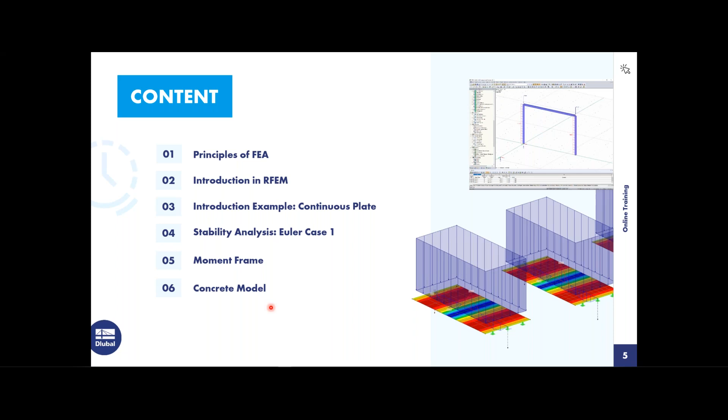So to start off, we are going to go through the basics of finite element analysis. Basically, computer software is based on the displacement method. Another method you may be aware of is the force method, where the unknown is the force, and then you can calculate the internal forces based on this. With the displacement method, the unknown is the displacement of the structure or element that you are modeling. First, you calculate the displacement vectors, then the internal forces, and after that, the support reactions.

Next, an analytical solution can prove to be difficult with large complicated structures. Doing hand calculations for a large complicated structure can almost seem impossible, and the limits are basically being reached. So it is hard to yield accurate results, and this is where FEA is then required.

So with FEA, the structure model is taken into the program and converted into a finite interconnected element mesh. Then the material and the cross-section properties are given at each of these FE nodes, and the mechanical behavior is transferred between each of these elements within the structure. A good word to know is discretization. This is basically when the structure is being submeshed into finite elements. So I'd like you to walk away with this word.

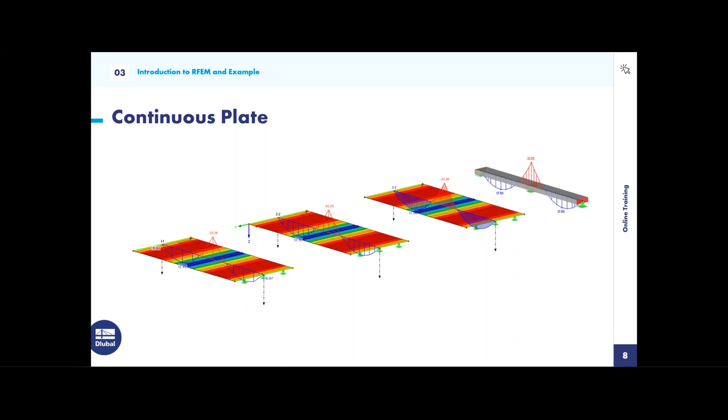So now I think is a good time to start the continuous plate example. You can see a continuous plate is modeled here. We have 3 of them. We're going to compare the results of the bending moment with this continuous beam at the end here, and I think this should be pretty interesting. So now we can jump into RFEM. I'm just going to pull up RFEM.

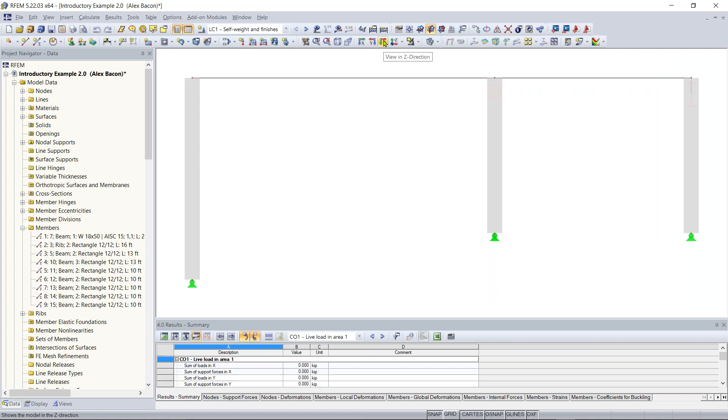Now, if we want to change our view within this work window, we can do that up here in the view section of the toolbar. If I want to maybe get a side view of either the XZ plane or the YZ plane, we can do that. We can also look at the Z direction to get a top-down view.

There are also more options within this drop-down menu, and we can view maybe the reverse Z direction to get a bottom view of our structure. We can also set our structure to an isometric view to get a nice clean view, which is also helpful if you need to reset the view of your model.

On the left-hand side here, back in our project navigator, at the bottom under our add-on modules, we have the list of add-on modules within RFEM. With the student license, you do have access to all of these add-on modules, which is very nice.

These add-on modules are used for design. RFEM is great for getting the analysis of internal forces and deformations on your structure, but if you want to design something, such as a concrete member or a concrete surface, you need these add-on modules.

And you don't have to have all of these add-on modules. Let's say you only want to design concrete members and surfaces, you can just simply purchase those add-on modules. But for you guys, they come with the student license.

So now we can move on to the tabs down here at the bottom of our project navigator. We have our Display tab -- this one we were in is the Data tab. Under the Display tab, you have lots of customization abilities where you can turn off or turn on anything within the model. You can see that all these options are organized within trees, and we can click the plus to expand these trees.

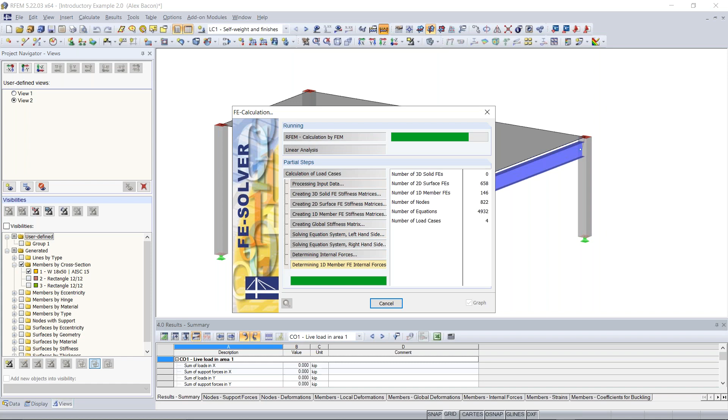Next, we can view results. I can go up here to my Calculate All button, and this will run a calculation on our structure. Right now I'm only viewing one load case, and that is the self-weight of the structure. So you can see all my global deformations are being shown right now, and I can get an idea of how the structure will handle the self-weight.

As you can see on the right-hand side here, we have our panel, and that gives us the corresponding numeric value with each color. Then on the left-hand side, again, we have our options or data organized in trees. So let's say right now I'm viewing my global deformations, but maybe I want to view the internal forces or the shear on my members.

So I can view the shear in the Y direction on my members, and that will give me these diagrams. You can see I can also change the rendering of this model to get a better view of these diagrams if I want.

I can change the view to just a wireframe view, and the red diagrams show negative, so these are compression forces, and the blue show positive forces, so those are the ones in tension. I can also view my moments, and I can view my axial forces as well.

And then I just have one more question before we move on to the modeling of the continuous plate. And you should see that on your screen now.

Okay, I'm going to close the test. And now we can review. And awesome, looks like everyone actually got the correct answer.

So the question was, what is RFEM? Let me share these results for you guys. Question was, what is RFEM? And the correct answer was, it is a 3D FEA program for calculating members, plates, shells, and also solids.

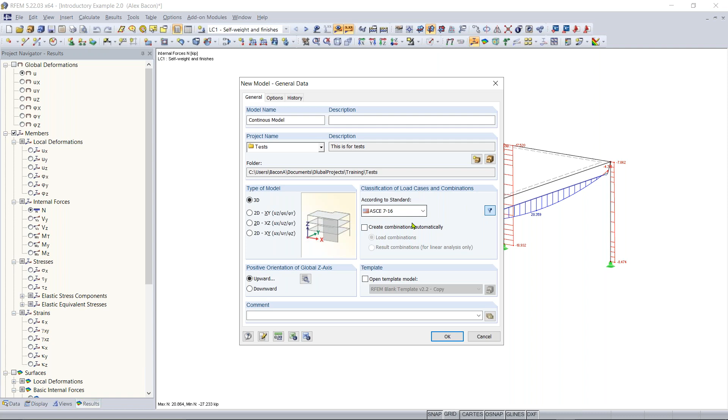And then over here we have our classification of load cases and combinations. So let's say you want to create load cases and combinations automatically based on a standard, you have the option for RFEM to do that for you. Here we have a long list of codes from around the world that you can use.

And then basically that is the information that you need to enter to create a new model. So I'm going to click OK, but before I do that, I would also like to mention you can change the units and decimal places of your model at any time throughout modeling.

So let's say, right now for this example, I'm going to be working in imperial units, but if you'd like, you can also change your imperial units to metric. You can do that by clicking on this folder button down here, and then you can click on metric, hit OK, and then set that as default, and that'll change and convert all of your units to metric.

Here you can also change individual units throughout the model, loads, results, and dimensions, and you can also increase or decrease your decimal places as well. I'm going to leave all that as default and leave it in imperial, and then I'm going to click OK.

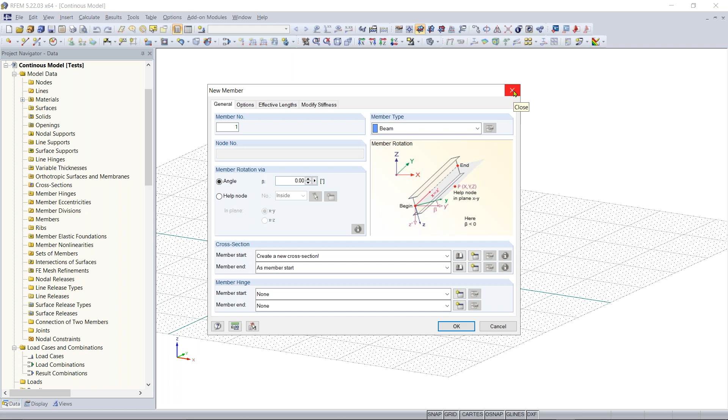And I'm going to go up here to the left-hand side, and I'm going to go to New Single Member. I'm going to click on this button. And this would be the tool to use if you were going to create your I-beam or members. But first we're going to model the continuous plates. So I'm going to exit out of that.

And then I'm going to go to this tool called New Rectangular Surface. So here we're going to click on the New Rectangular Surface button. And then now you can see we have our new rectangular surface window right here. And this is where you're going to enter the data needed to create the surface. So first, you can see we have our surface number right here.

And then we also have our material. Right now, by default, this is set to steel. And I want to make this surface a concrete surface. And to do that, I can go to this button right here, and this one's called Import New Material from Material Library. I'm going to click on that button, and now you can see this window pop up called Material Library.

So here you can see on the left-hand side, we can filter by category group and then standard group. So first I want to click on this drop down, and I want to select concrete. And then the material category of concrete I want is just regular concrete. And then the standard group, for this example, I'm going to be using the ACI, but we also have other standards as well, such as the CSA and etc.

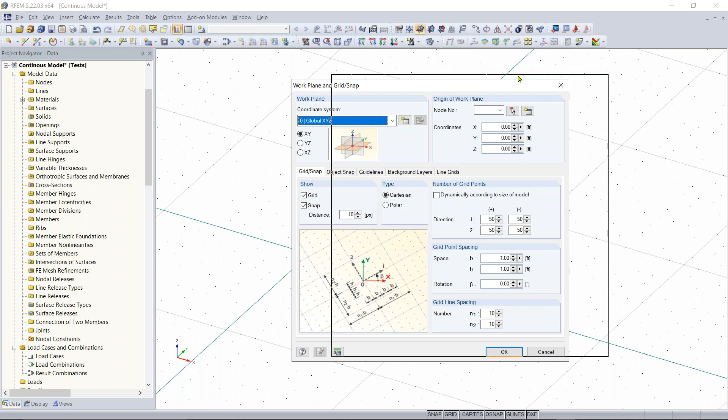So if we click on this button, our work plane and grid/snap settings will pop up, and you can see on the right hand side here we have our grid point spacing, and right now this is set to 1 foot by 1 foot. So each of these points is 1 foot by 1 foot away. And you can also choose how many grid points you would like in each direction as well. Right now this is set to 50.

We also have this nifty option called dynamically according to the size of model. And this is nice because if you don't want to worry about how big your grid is, and you just want the grid to change size depending on the size of your model, you can have it do that.

So now back to creating this rectangular surface. So I'm going to click on rectangular surface again, and then I'm going to click on OK, and this will bring my modified cursor back up. So now I'm going to rotate the model just using the mouse and keyboard, and I'm going to click on the origin, and I'm going to left click, and now I am drawing my rectangular surface, and I want this rectangular surface to be 32 feet by 16 feet.

So I'm going to go 32 feet in the X direction, and then I'm looking at my coordinates and I'm seeing 32, and then I want 16 feet to be my Y coordinate or my height. I'm going to left click, and now you can see that that rectangular surface has been created within this grid plane.

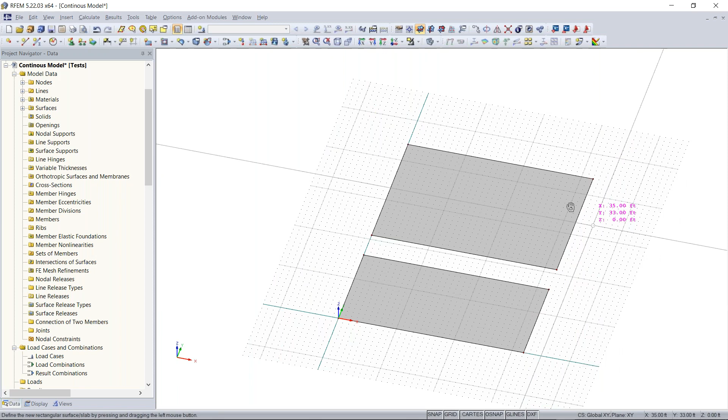So what we can do is highlight, double click on the node. I can change this from 44 feet to 36 feet. There we go.

So now that our second plate has been created, instead of having to recreate this plate, we can just simply select the whole plate and we can copy and paste our plate. So I'm going to select this plate, and we have a feature called move and copy. So what I can do is I can right click on this plate, and then I can go up here to my move and copy tool. I can also go up here to the move and copy tool in the toolbar.

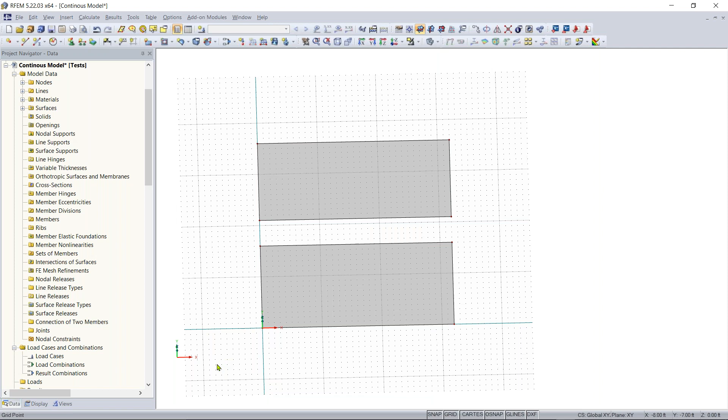You have to make sure that you have your element highlighted. This is also a good time to mention highlighting things. So highlighting something from left to right is different from highlighting something from right to left. So if you highlight from left to right, this will only select elements within this window. But if you highlight from right to left, it'll select any element that touches the window.

So I'm going to highlight this plate. I'm going to go up here to my move and copy tool, and I want to make just one copy of this plate, and I want to move it in the Y direction. I can enter the coordinates where I want this plate to go, or I can also use this button to create a displacement vector graphically.

So I'm going to click on the corner here of my plate, and I want it to be 5 feet above this plate. So 2, 3, 4, 5. It's going to go right here. So now that my vector is created, it's going to move it 41 feet in the Y direction, make one copy. I'll click OK. And now you can see that the plate has moved 41 feet in the Y direction, and it's 5 feet above the second plate.

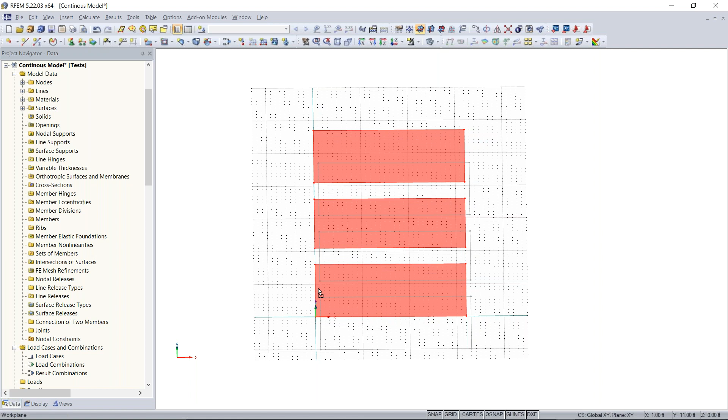So now I want to take all these three plates, and I want the center of all of them to be on our origin. So I'm going to highlight, and then I'm going to click. I want this corner, this left-hand corner of this plate, to be on the origin. So I'm going to click on that, and then I'm going to move it down by just left-clicking and dragging. And that's an easy way to highlight and move things within RFEM. It's just highlighting and clicking and dragging.

Now we can create the continuous beam, AKA create the new member. So up here, this button I showed earlier, we can click on new single member. And you can see that now our new single member window has popped up. And again, this looks pretty familiar to the rectangular surface. We have our member number here. And then down here, we have our cross-section section. And this is where I'm going to create my cross-section. So right now there's no cross-section defined.

So I'm going to go here to import from cross-section library. And then I want to create a rectangular concrete cross-section. So within this cross-section library, you see we have our rolled sections, built-up sections, parametric thin-walled sections. Today, we're just going to be focusing on our parametric massive sections, and I want to make a rectangular section. So I'm going to click on rectangle, and then you can see you have lots of different types to pick from within these cross-section types.

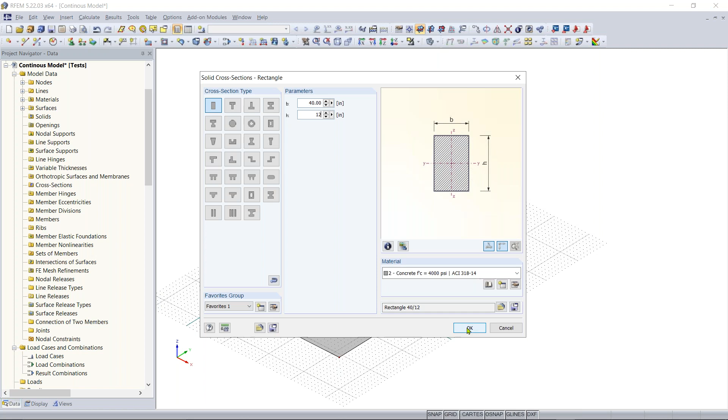And now my cross-section is shown on the right-hand side here. And the start of my member has this particular cross-section. So I'm going to click OK. And now my cursor is ready for me to draw in the work window the continuous beam.

So again, I'm going to space this 5 feet away from my previous plates. I'm going to left click here, and you can see that there's a line showing you what you're about to draw. I'm going to make this the same length as my plate. I'm going to left click, and now you can see that my rectangular concrete beam has been drawn.

Now we can go through, and I want to add a line or a continuous support down the middle of these plates, and I want to add a support to this beam. So let's say I want to divide these lines here. Right now they're continuous lines, and I want to divide them and add a node in the middle of them so I can draw a line down the middle. And an easy way to do that is just to right click on the line.

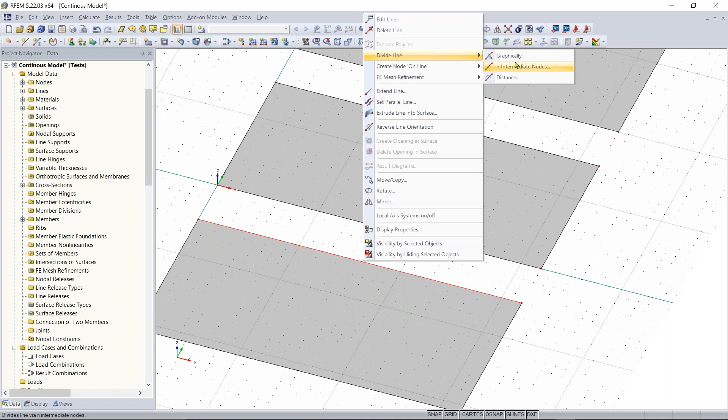So now I can do this for the rest of my lines. I'm going to right click on this line, and I can also do this by going to n intermediate nodes, and I can set this n intermediate nodes to 1. So this will just equally space out depending on how many number of nodes you want to place on your line. So if I just create 1, it'll divide the line and create this node in the middle here.

And then the third option for dividing a line is by doing it graphically. So once I do that, you can see here that the coordinate pops up next to my cursor, and you can see I can just place that node anywhere I want on the line, and I can click and divide the line. And then I can right click anywhere in the space, and that will cancel out of that tool.

So now I'm going to do that for the rest of my lines. So I'm going to right click, divide line, distance. And instead of having to do this for each individual line, I can go up here to the select lines button, and I can select the rest of these lines, and I can hit OK and divide all of those as well. So now we have nodes at the middle of our lines for each of our plates.

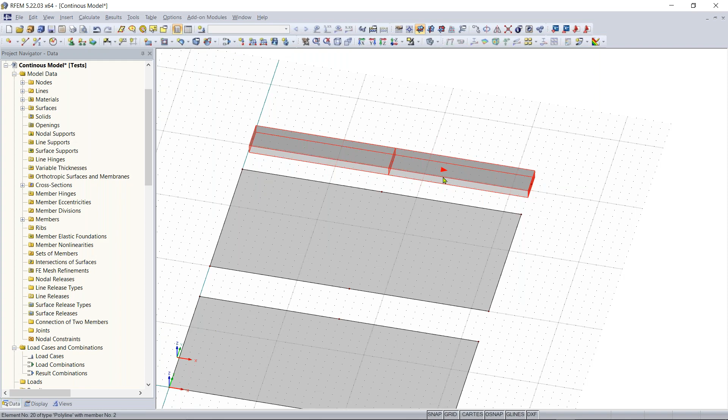And now I'm going to do the same thing. I'm going to divide this member. And again, we have the same options. I'm going to do this by distance, and I'm going to make the node at 50% of the member. So now our member is divided as well with a node there. Now I would like to draw a line connecting these 2 nodes. And this is where our line support is going to go, supporting the midspan of these plates.

So now I can go up here, and there's a tool next to the new single member tool called New Line. And I'm going to click on that. And now I can draw just a line connecting these 2 nodes. When you draw a line, make sure you right click outside of it to cancel out drawing the line continuously. I'm going to connect these two nodes here.

And now that those nodes have been connected, we can simply add our line supports in as well. I did want to show you also another great option: if you Control Z, you can undo things. And instead of having to draw the rest of these lines, I can simply hold Control and then left click and drag, and that will make a copy of anything that was highlighted. So I'll highlight a line, Control, left click and drag, and that will create a copy. There we go. Now we can add in our line supports.

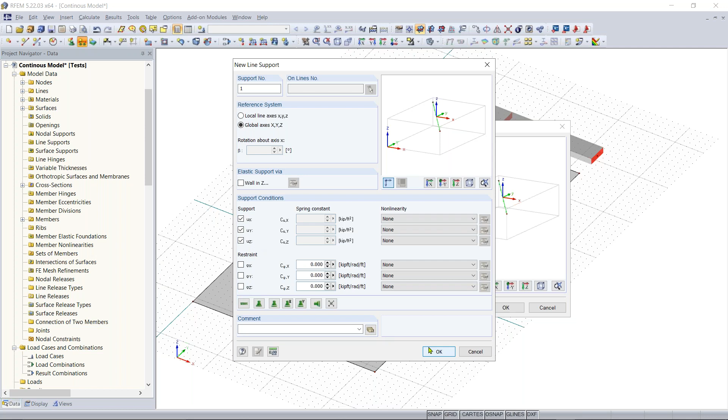So if I check off UX, that means that the support will not allow the structure to move in the X direction. But if I uncheck it, then that will unlock that direction. Right now, all rotation is not fixed and the structure is able to rotate about that support. So this is what we're going to keep. I'm going to click OK again. And now we can apply this line support to all of our midspan lines here. So now you can see this green line along with our green line supports is added.

I also wanted to add the support to the edges of our plates. So to do that, I'm going to hold Control, click, and I'm going to add those line supports to the ends of our plates as well. Make sure everything is highlighted before you click, hold Control, drag. Now we can add those supports to our outside lines as well. Oops. This one doesn't seem to want to go. No matter, I can just go up here to my tool, click OK, and just add that graphically. I can right click and cancel out of that.

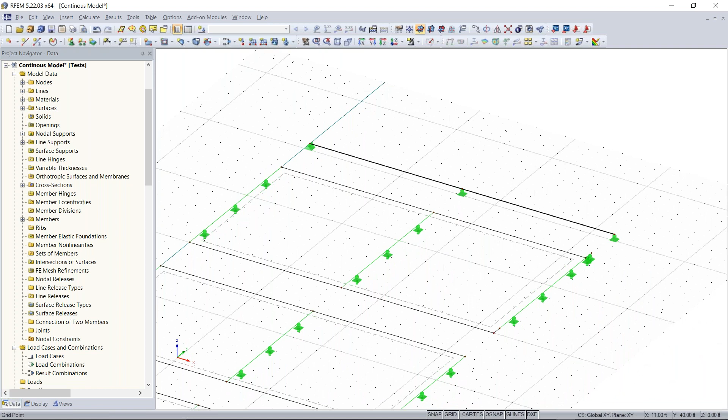So now that we have our supports defined and almost all of our model data entered, we can now focus on adding the loads to these different elements. It is important that when we add our loads in that we create a new load case, because every load needs to be assigned to a load case. So to do that, we can go up here to this button called New Load Case and click on that. We can also go on our left-hand side in our project navigator, go down to Load Cases and Combinations and Load Cases, and simply right-click on Load Case and click New Load Case.

So now you can see that the Edit Load Cases and Combinations window pops up, and we are under our Load Cases tab here, and the program has created a new load case for us. So this load case, I'm just going to call test and dead load. And I'm also going to put in here that the self weight of the structure is off.

So right now that's the title, and the action category of this load case is dead. And you can see that for dead loads, the self weight of the structure is automatically taken into account. For this example, I'm going to turn that off, and I'm going to click OK. So now our load case is created, and you can see that up here in our drop-down window, we have one load case. And now I can apply the loads to the surfaces.

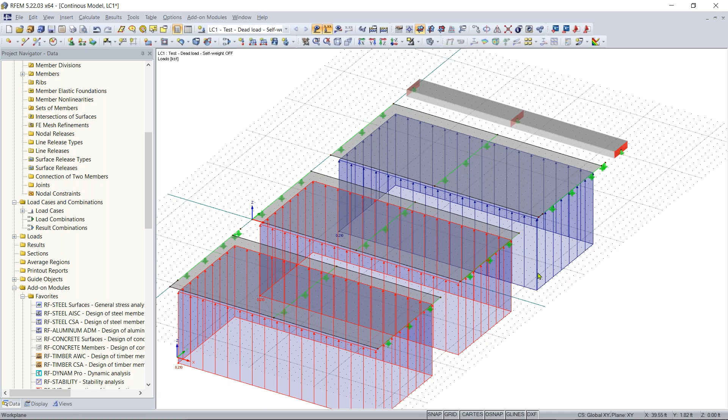And I'm going to click on each one of these plates. And you can see after I'm done clicking on them that our load is being pushed from the bottom up. And this is fine, but for this example, I would like these loads to be applied to the top of the plate. So I'm going to control click on each one, double click, and double clicking on anything allows you to edit elements within the program.

So I can easily switch the orientation of these by applying a negative sign to my magnitude. And now you can see that my loads have been flipped right side up, and now they're applied to the top of our plates. So rotating the structure, you can see that our loads are applied to each plate, and we need to add a load to our continuous beam here. I can also increase the size of these nodes. There we go. And now I can add in a member load.

So to create a new member load, this is up here in this toolbar next to new surface load. And I'm going to click on new member load. So also another thing to keep in mind is we have a tool for member loads and a tool for line loads. So just remember that you should use member loads for members and you should only use line loads for lines. Line loads are basically if you wanted to apply loads to only the perimeter of these plates or to these lines. And then member loads are for members or beams and columns.

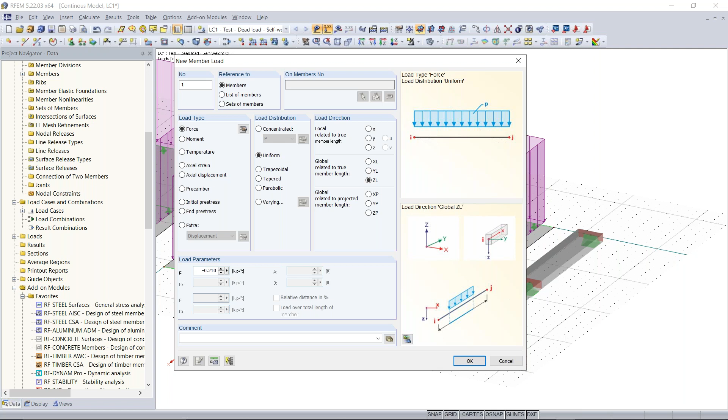So again, we're just going to make this load simply 210 pounds per foot. We'll click OK. And now we can apply this to our member. I'm going to right click anywhere to get rid of that tool. And now all of the loadings that we need for this example are applied to our individual elements here.

Another thing to keep in mind for your structure is the FE mesh settings. So normally you don't have to fool with this before you look at your results. But for this example, I would like to show you what having different sized FE mesh looks like. So this first plate here, we're going to have a larger FE mesh. I just noticed here that my line supports are a little messed up here. I'm just going to delete this.

I'm going to add in extra line support at the end here. Right click, there we go.

Normally, if you go up here to calculate, and then over here we have our FE mesh settings, you can change the size of the FE mesh right here under general, and this is for the target length of the finite elements. Right now, the size is set to 1 foot, and that's the FE mesh that's going to be applied to the whole entire structure.

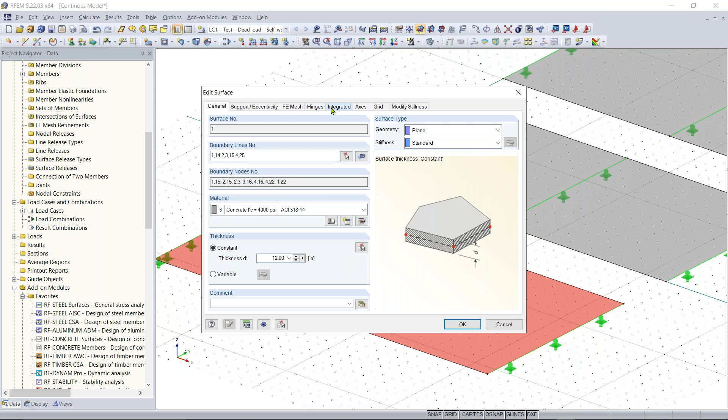I'm going to go up here to my FE mesh tab, then to FE mesh refinement, and click available. That will create a new FE mesh for this whole entire surface, and I can change this FE mesh length to 0.75 feet. I'm going to click OK.

Now you can see this icon here has been added to our surface. This tells us that we have an FE mesh refinement applied to the surface, and also gives us an idea of how large that refinement is with this icon.

Next, I want to add an FE mesh refinement to the second surface. Just to show you another way to do this, you can go over here to your project navigator, where your surfaces are organized - you can see we have 1, 2, and 3 here. I'm going to double click on 2, and under here again I'm going to go to the FE mesh tab and go to available. Once I click available, right now it's set to the FE mesh we made for the other one.

I want to create a new FE mesh refinement, and I want to make this one 0.5 feet, so this one's going to be a little bit smaller. I'm going to click OK, and that icon was added, letting us know there's an FE mesh refinement on that surface.

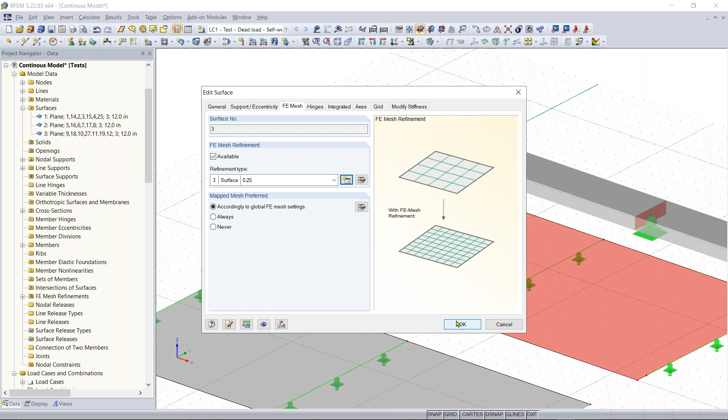I'm just going to add one to this third surface by double clicking on it. We're going to go to FE mesh, then available. I want this one to be even smaller, so I'm going to create a new one for a surface and make this one 0.25 feet. I'll hit OK again. Now you can see the first plate has the largest FE mesh defined, and it's going to get smaller as we go down the list here.

Now I would like to create section cuts before we run our results. Section cuts allow us to get an idea or show us a diagram of results, and we want this to be down the middle of our plate.

To do this, I can go over here on the left-hand side in the project navigator. To create a section cut, I can either right-click on the sections category here, or do this up in the toolbar with this button called New Section, and I can create a new section numerically.

I'm going to right-click on Section, create New Section, and we have our New Section window here. I'm going to name this one AA. Everything else here by default is good - we don't have to change anything. We want our section to go through a surface, via plane, and the plane is going to use the local z-axis.

To create the vector or direction we want our plane to go from point A to point B, we can click on that, and now we can define our section graphically. Since we want to create our section down the middle of our plate, I'm going to click on the midpoint here - you can see, just like AutoCAD, the cursor locks onto the midpoint very easily. I can click on the midpoint and then drag it down and click on the other end of the plate. Now that vector is defined for our plane, I can click OK.

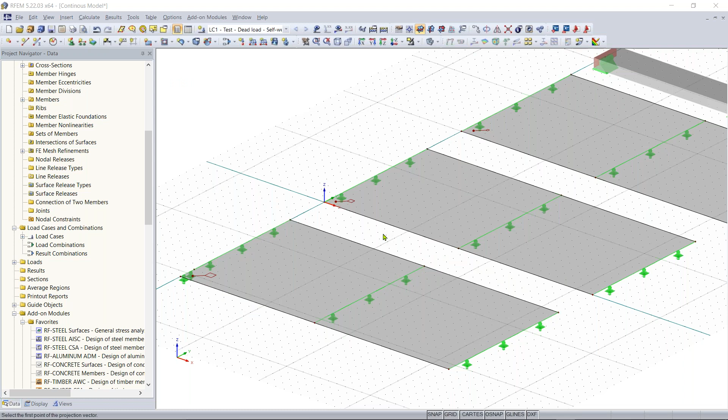Oh, it didn't define my... let's try that again. There we go. Let's try creating this one more time. I'm going to go over here to New Section, create my plane vector, and enter my name.

So let's try this on a different plate. I'm going to enter my section name, then draw my section vector. And it's telling me that the line beginning and end nodes are identical.

I believe that my line supports are not defined correctly here. So I'm going to delete that and just define my line supports again, and also check to make sure these are defined correctly and I don't have multiple line supports on top of one another.

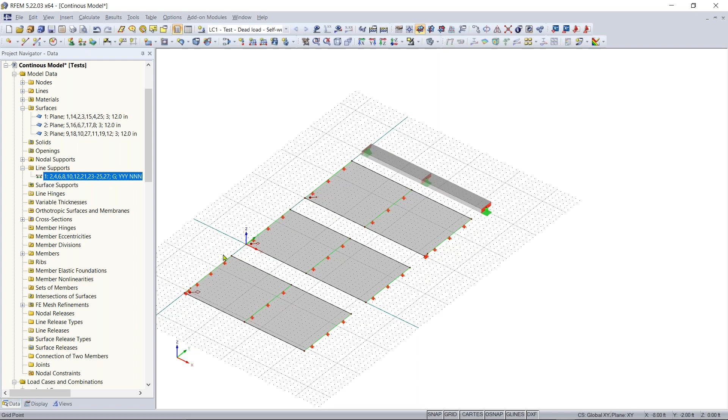I'm also just going to hide these. And now I'm going to create the section cut again. I'm going to draw that, and then draw my vector, enter the name.

One more time, it'll be created. So we have our section name, vector, click OK, and now we have our section created.

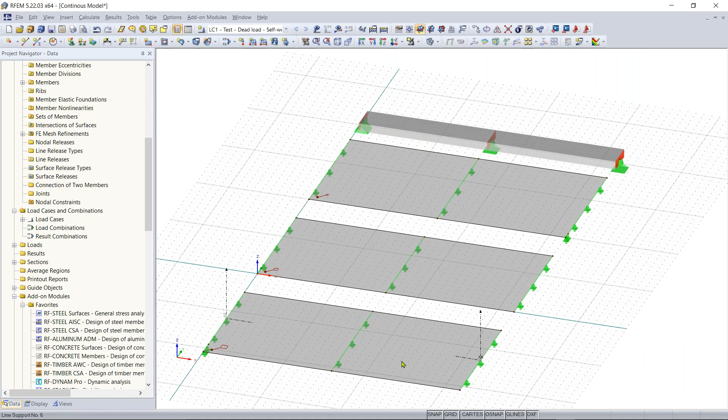So now I can turn my line supports back on under the display tab. And now our first section here is created on our first plate, since our line supports are defined correctly.

Let's say I want to create this one more time, I can show you. So basically, if you want to create a section cut, you can go over to the section category and click on new section. I'll go over it one more time just to make sure it's clear. So the section name, you can enter up here.

It's going to be via a plane, and the vector you don't have to worry about. You want to make sure you set your first edge point and your second edge point, point A and point B. You want to click this button right here. You can define these coordinates if you'd like, but you can just click this button to do it graphically, and with your cursor click point A, then point B. Once you do that, you can hit OK.

And it's just telling me that the section name is already created, so I just need to make that unique. I'll click OK, and now our section cut is created.

I just want to add that the projection vector essentially points the section in the right direction. By default that's set to Z in the vertical direction, but if a user wanted to change it to the global X or Y axis direction—let's say you have a wall and need to make a section cut through a vertical wall—then you would want to change that projection direction. But for a flat surface, as just shown, the Z direction by default is correct. Thank you for the clarification.

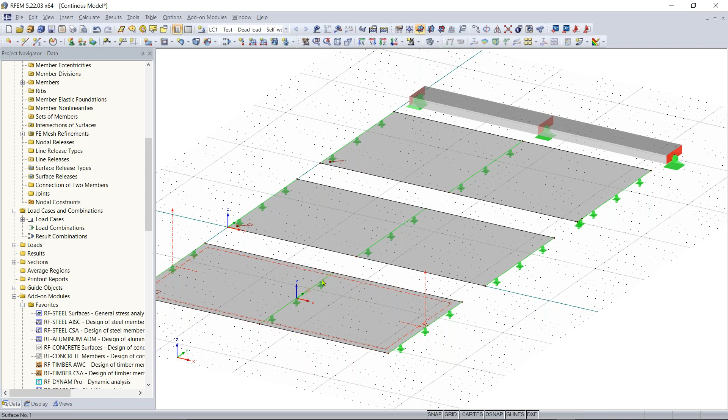Here you can set that, you can change your local and global plane. To clarify further, on the left-hand side we're looking at our global X, Y, Z axes, but each element in RFEM has a local axis as well. You can see when I hover my mouse over the plates that the local axis is shown. To distinguish between those, the global axis always has a capitalized letter, and the local axis always has a lowercase letter.

So to continue, if I wanted to take the section cut instead of having to define it for the rest of these surfaces, I can hold Control, left click, and drag the section cut, and it'll place that section cut on the rest of my plates. Make sure you highlight it, hold Control, then click, and that will copy it.

So now that we have our section cuts defined here in the projected local Z direction, we can move on to our calculation and showing our results.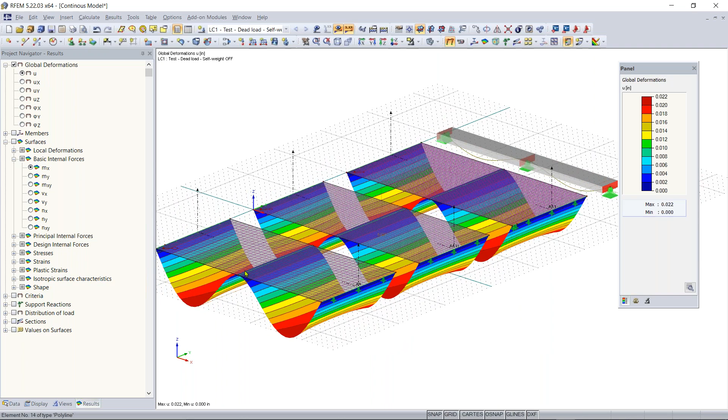And now you can see right now that we have our results tab here in our project navigator, which wasn't there before. This only comes up if you have results. And right now we're viewing the global deformations, so you can see we have the colored cross section or the colored planes giving us an idea of what the deformation is on each of our slabs here.

And again, we have the panel on the right-hand side. If you can't see this panel, you can also turn this on and off up here under the toolbar, just like the project navigator and the tables. So that can be turned on and off. And then you can see on our continuous beam here that our deformation is just shown as this yellow line.

Let's say you want to view it as a colored cross section, kind of like these planes. We can do that by going under here to the display tab, and then we go over to our results section. I'm just going to collapse my model options here, expand results, and then under the deformations section, expand that, and then expand members, and here I can choose cross sections colored.

So now that that's activated, I'm going to go back to the results tab, and maybe we want to view the internal forces on our member here. We can turn off global deformations, uncheck that, and I'm going to expand members here, turn on members or results for the members.

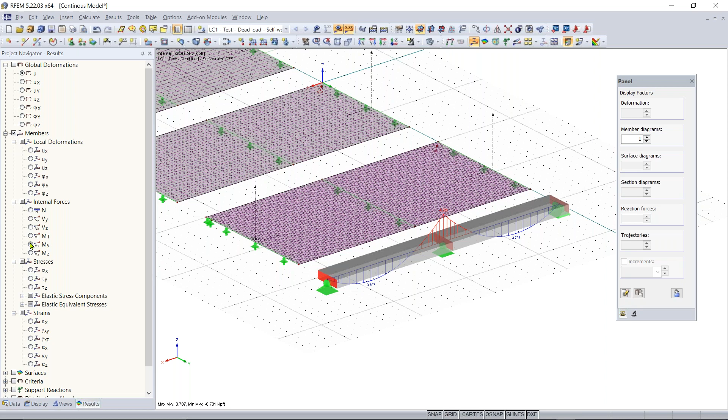And maybe I want to view the moment about the y-axis. I can turn that on under internal forces. And now we get this moment diagram that is illustrated on our beam. And you can see that, again, blue is tension forces, and then we have our peak here, which is our compression forces.

And then we can also go in and view the internal forces of our plates here. So I can turn those on simultaneously. I can go over here to my surfaces category and check that off. Right now we are viewing the basic internal forces, mx, of our plates. The value for each corresponding color is shown in our panel here. On the side, we can get our max moment and our lowest moment right here.

And let's say maybe you want to view a diagram on these plates, just like the one in the member here, to get a better idea of the peaks and valleys. So we can go over here on the left-hand side and turn on our section cuts. And now you can see that we have our peaks and valleys, or our tension and compression forces, based on our section cuts right here. That is giving you a better visual of the moments on our plates.

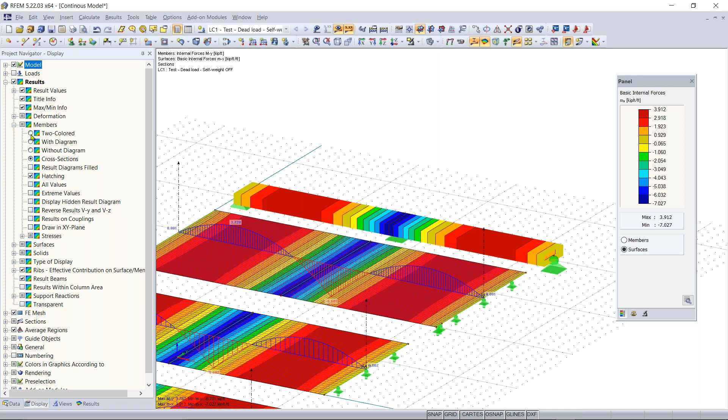Okay, so basically you can go under the display tab, and then under results, instead of deformations, you'd go under members. Results, members, we have options here. Right now I have it set to two colored. You can also change this to colored with diagram. Maybe yours is set to just colors showing the results on the continuous beam. If you want to see this moment diagram, that would have to be checked on. If there are still questions, feel free to email us after the training and send us the model so we can take a look.

And then the second question, can you change the size of the display result numbers? Yes, if you're talking about these individual values, you can change the size of any of these fonts. The easiest way is to click on the member and right click on it. Then go down to display properties. Within this display properties window, you can customize a lot of different things. Right now we'll just customize the fonts. So we'll go to fonts, then results, and then internal forces of members.

Once this comes up, there's a button down here called set font. Once this is open, you'll have your size window here. I'm just going to enter 11 and click OK. And then you'll see that the font size has increased within the window. So I think that should answer that question for Julian.

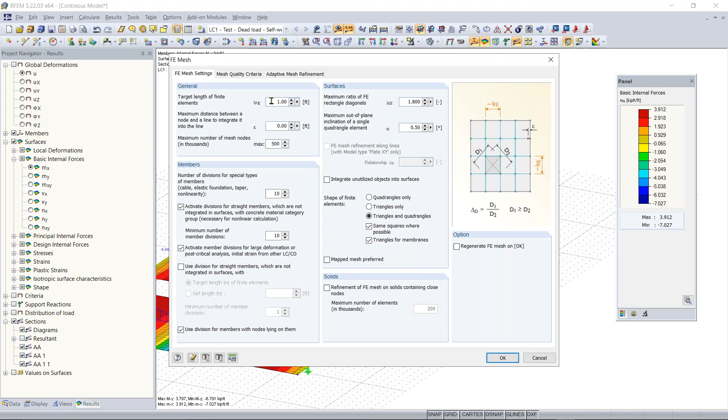And under calculation, we can go to FE mesh settings. I did mention this before, but I'd just like to mention again that you can change the global FE mesh. If you have a large structure, you don't have to change the individual FE meshes. You can just go up here and it'll change the FE mesh of the whole structure. So I'll click OK and everything's good in there.

We have another question from one of the attendees. Has the result of the stresses been verified against Roark's formula for stress and strain? I appreciate the Roark's formula is primarily for linear analysis, small displacement.

I don't know that information right offhand. To my knowledge, I don't believe we've used that formula for comparison, but of course we've run many different verification problems. I'm just not sure which theory. So if it's okay, we will just get back to you on that after the training. Yep. Okay. That sounds good. Thank you, Amy.

Then we can move on to the calculation parameters, which we can change within here. So we are going to get into the theory a little bit. Roark's formula isn't something that we are going to discuss, but we can go up here to calculate, and then down here to calculation parameters. So under calculation parameters, once this window pops up, there's many options here, but I just want to point out and isolate one option.

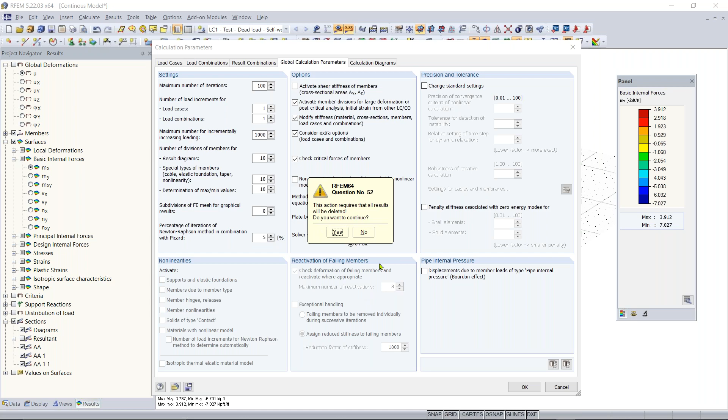So once this is turned off, you have to click OK, and it's going to ask us if we change something. This action requires the results to be deleted. I'll click OK. Now the results are deleted, and we can run the results again. I'm just doing this to give you an example that if you turn off the activate shear stiffness of members, it's going to affect the bending moments. So before, our values were different compared to now, if you remember them from before.

And the reason for this is because the methods used in school assume that there's an infinite shear stiffness when in reality there are some shear deformations that go on within these elements. So if you're trying to compare hand calculations to this bending moment diagram, then this is an important option to turn on or off. So keep this in mind when comparing hand calcs.

Now, we can move back to the PowerPoint, and this is where we're going to discuss some plate theory. So another quick question from a user. Can we find the distance of the moment change point, tension to compression, from one of the end supports? I think what's best here is to right click on maybe the member and show the results diagram.

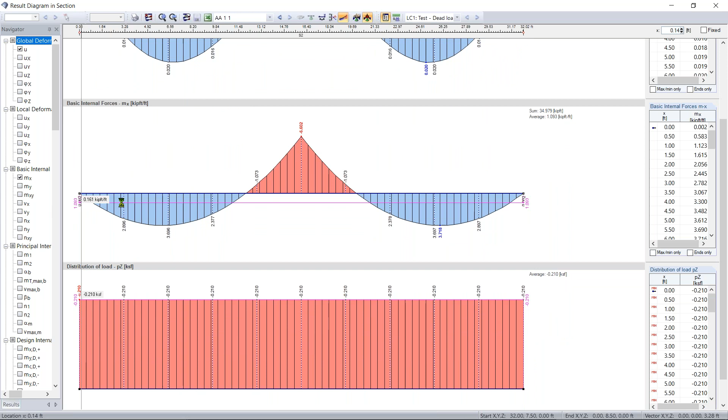So if you wanted to view that for the plate, you would just have to click on the section cut here, right click on it, and then you can also open up this results diagram as well. And then once it loads, you can see you have your global deformations, moments. If you want to see maybe your shear, you can turn that on as well. So that should be down here.

And then we have another question for continuous beams. The thickness plays a great role for thin and thick plates. How do we handle this issue here in RFEM? And I can go ahead and answer that. Yes, it is important, a thin or a thick plate.

When we're getting into a surface element whose thickness is relatively comparable to its width, then you would want to convert this to a solid element, a 3D solid element. So we have some recommendations in our FAQ of when you need to consider a solid element instead of a surface element in order to get accurate results.

But a good way to think of this is a brick element. If you're trying to model something that looks more like a brick, then probably a solid element would be better than a surface. So hopefully that answers your question.

Awesome, great explanation, yeah. Yeah, unfortunately, I'm not getting into any solid elements this training, but we do have those FAQs and lots of resources on our website for that.

So I do see this other question. How do you change the sign of compression and tension in the moment diagram? So yeah, I'm not sure, I don't think you do. So within the diagram, the sign tells you which point is in tension and which point is in compression. Or well, for the moment diagram, it would be your direction of the bending moment.

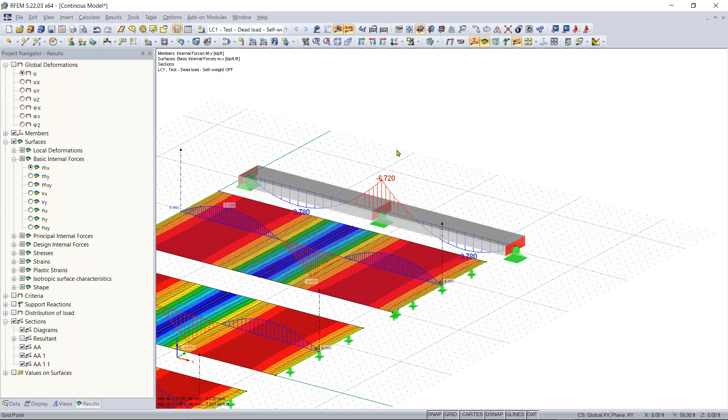Yeah, and I'll just comment on this. This is based on the right-hand rule. When you're looking at moment diagrams, you have positive and negative moment, and that's the convention that RFEM goes off of. So you don't have the ability to change the sign within the program. It goes off of the right-hand rule. Yep, the right-hand rule. That's good.

So any more questions before we move on to the plate bending theory? Awesome. If you don't have any right now, you can save them for the end as well. So I'm going to go up here and change. We're going to go back to the presentation. Sorry, one second. So now we can get into some plate theory for RFEM.

So this is an analogy for beam elements. One of the theories for beam elements is Bernoulli's theory, and another theory is the Timoshenko theory. So for Bernoulli's, these are the two assumptions we make. We assume that the cross sections remain in plane and perpendicular to the member axes. And then Bernoulli's simplifies and assumes that there's no shear deformation, so the beam has completely rigid shear stiffness.

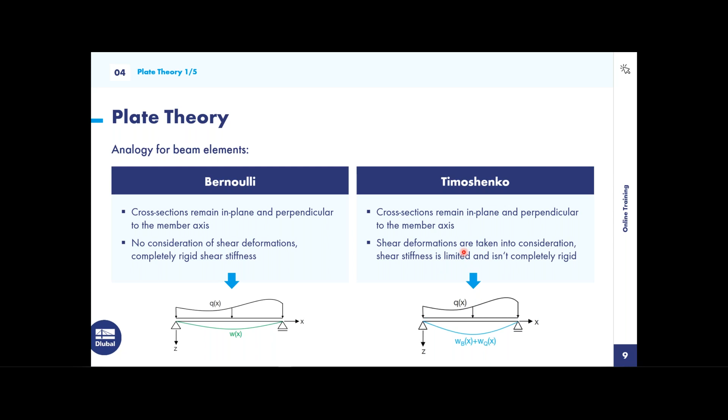For the Timoshenko theory, again, we assume the cross section remains in plane and perpendicular to the member axes. But for Timoshenko, shear deformations are taken into consideration and the member is not completely rigid. To show a good example of this, I have a graphic. With Bernoulli's, the deformation is completely perpendicular to the member axes. For Timoshenko, we have an additional angle, so additional deformation, due to the shear deformations being taken into account.

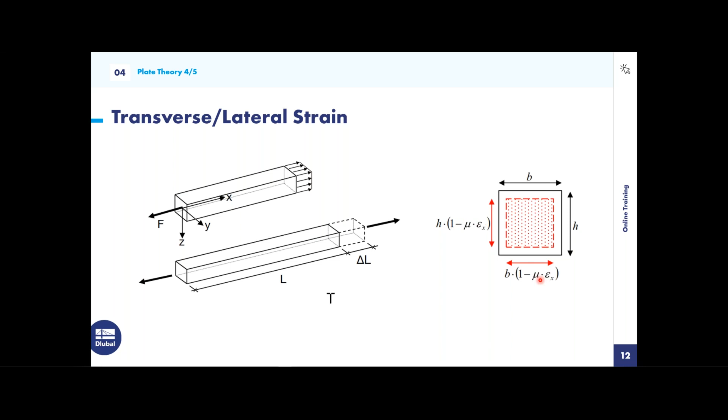So transverse/lateral strain: for an example, here you can see we have a beam, and when a tension force is applied to it along its length, the cross section over here will shrink with regards to its height and its width. So you can see here that this mu factor is used to take this shrinkage into consideration. And this is what is being taken into account with the Reissner-Mindlin theory.

So just to summarize the Kirchhoff theory and the Reissner-Mindlin theory for plates. For the Kirchhoff theory, no consideration of shear deformations is taken into account. And this theory does yield great results when you use very thin plates, for example, concrete slabs. And you have to keep in mind that this only considers pure bending load bearing capacity, and this is overall more of a simplified approach.

For Reissner-Mindlin theory, shear deformations are considered. This theory is great for thick and thin plates. The shear influence component is relatively high for this one, and there is a significant error when neglecting shear force. We also have a higher value approach for this theory, and for shear forces, this one does yield a little more accurate results.

So in my opinion, the Reissner-Mindlin theory is what you should use probably almost 100% of the time. And it's just good to know the difference between these two theories as well. So now going back to RFEM, we can look at our calculation parameters again by going to calculate and calculation parameters. And you will see that under global calculation parameters, we have down here plate bending theory, and you can switch between the Mindlin theory and the Kirchhoff theory.

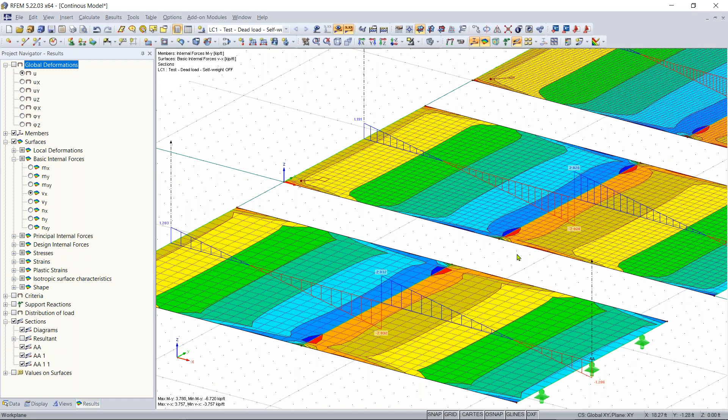So right now, let's take a look at the results, and we can see how those change depending on which theory we have activated. So let's take a look at shear. Right now I'm under surfaces, and I'm taking a look at my shear diagrams through my section cuts on my plates. And we got around 2 here, around 2 here. That's kind of consistent throughout these, even with the FE mesh change.

So let's say I go up to calculate, and I go into calculation parameters. And that window will pop up, and I can change from the Mindlin theory, which is by default, to Kirchhoff. I'll click OK. I'll hit yes. It'll clear my results because I changed the parameter. I'll hit calculate all. And our results should change, probably not significantly, but very slightly.

So before it was around 2. So now our shear is a little bit higher now at 2.1. And you can see that those results have changed slightly. So I'm going to go back and I'm going to change that back to the Mindlin theory.

And while I do that, I do have a question for you guys. So that should come up, whoops, right now. And I'll just keep that up for a minute or so.

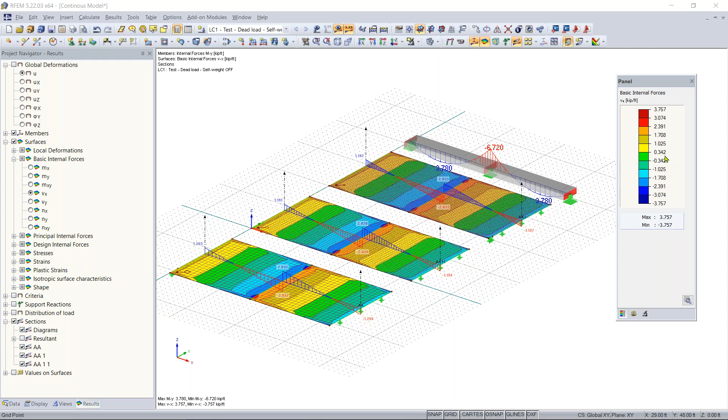So it looks like the majority of everyone submitted. So I'm going to close the test. And now we can review the results. So it looks like the average score is about 60%. So we'll just go over the question.

What happens if the shear stiffness is activated? And the correct answer is shear deformations are considered. So with shear stiffness being activated, this is saying that the shear stiffness is not completely rigid and it's going to change depending on the deformation. And this is what happens in reality with structures in real life. This is compared to having it off, which would assume a completely rigid shear stiffness.

So I'm going to hide the results. And then I just have a second question before we move on to the Euler case 1 example frame. So that should come up right now. Now I'll just give you guys around a minute for that or so. All right, so it looks like the majority answered. I'm going to close the test. And I'm going to show the results so we can view them. So great, looks like the average score is 91%.

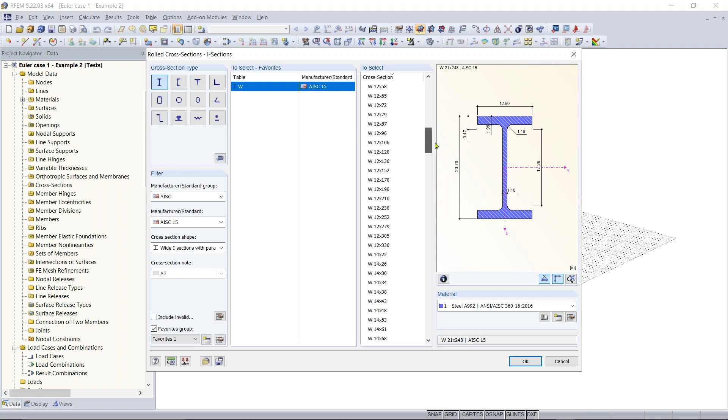Maybe I want to filter to exactly a W shape or I section. I can do that. And then on the right hand side here, you see you have your long list of different W shapes that I can pick from. And if I click on one, you can see it'll give me the dimensions over here on the right hand side. For this example, I'm going to use a 12 by 35 I section. So I'll click on that. And then the material, you can choose down here. You can click if you want to change this material.

I'm going to keep it as Steel A992, but for this example, let's say you want to change it, you can go to the import from material library. And this should look familiar from the last example. You can filter to metal and then category and standard group as well. So I'm going to keep this all the same. I'm going to click OK. And now you can see that under cross section, here we have our I-beam.

Maybe you want to get some info about this cross section, you can click on this I button here. And this info section will give you lots of cross-section properties and their values in units. So we can view depth, width, shear area. We can view our moment of inertia. Looks like there's a question.

May I know if there will be plans in the future to include the Australian/New Zealand profiles into the library? I think, Amy, would you know that offhand? I'm not sure if you are muted, Amy, or not, if you're still here. I believe, let's see if we have the Australian/New Zealand profiles. I can go under my cross sections in the cross section library. And once that opens up, yeah, I'm not sure offhand if we have those or not. And I can always just let you know later on through email if we're going to add those or if we have them. So yeah, I can find out for you after this.

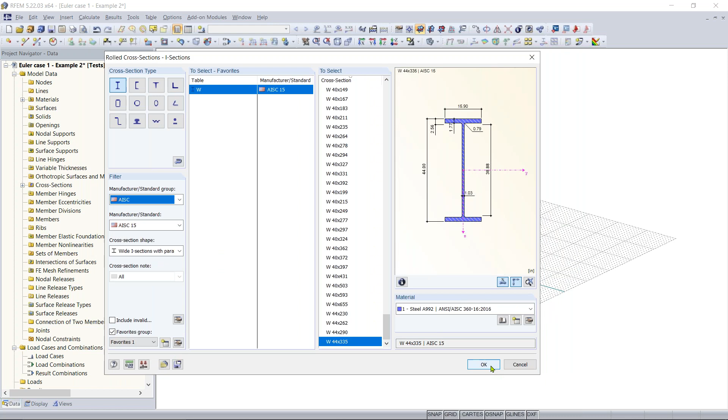Oh, did you? Okay. Yeah, I'll comment on that. We do have those profiles. I know we have Australian profiles. If New Zealand follows the same code, then those should be available directly within RFEM. Okay. Yeah. It looks like they think they saw it. So yeah.

So we can move on to... Oh, looks like I changed my cross section. Sorry about that. Changed my cross section back to 12 by 35.

My computer's lagging along here a little bit, so I'll just open this back up and change this to 12 by 35, I-beam. Click OK.

Now 12 by 35. So now I'd like to also demonstrate, so you can see our grid plane here. Oh, another question from Julian.

Is there a way to import codes from other countries to RFEM? If you're talking about creating load cases and combinations through the code, you can customize and create load cases and combinations, and then save your model as a template, and have that template open as a way to save customized load cases and combinations.

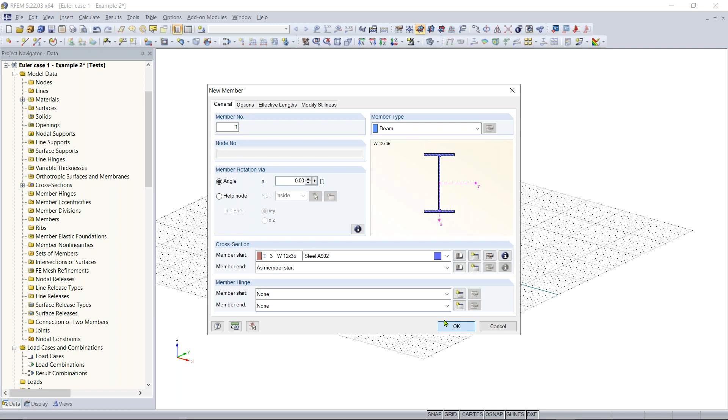Just as a follow-up, the attendee is wondering if Dlubal has add-ons with international codes. So all of these add-on modules within the program provide design for the model. Everything Alex is covering today is just analysis. There are codes, for example many steel codes, for many different international standards, including AISC, Eurocode, Chinese, Australian. So that's probably what you're looking for.

Again, if you don't see what you're interested in, you can always send us an email. Maybe we could consider it for future development. Thanks, Amy, that's a good explanation.

So I'm not going to get into any of these add-on modules today, but within this example I will get into the RF Stability add-on module. That's not per any design code, but we'll get to see how the add-on modules work within RFEM. So I'm going to continue creating this member.

If I want to create this member to the height or perpendicular to this grid, I need to change what plane I'm drawing in. Right now if I drew, I would only draw on this plane, not perpendicular to it. I can change my work plane by going up to this toolbar, and set my work plane to the YZ plane or the XZ plane, and draw a perpendicular member into the Z direction.

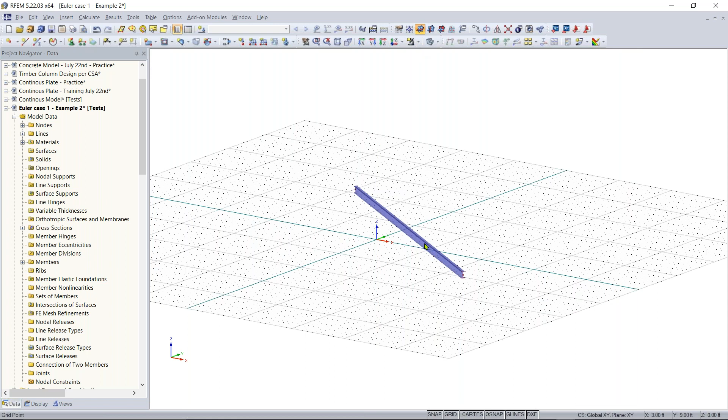I'm going to put this back to the XY plane, and let's say I don't want to change my work plane, and I just want to draw this column right on the origin. I can go back up to the New Member tool, check off the option called Length and Direction, and set this to perpendicular to work plane, then go over to my origin.

Let's say I want to make this column 30 feet high. I can enter that using my numerical pad, hit enter, and click on my origin, and that will enter that column. And that is... one second.

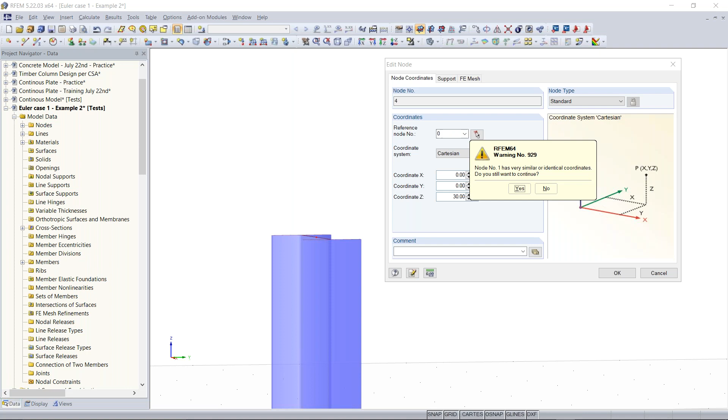That is not 30 feet high, so I can easily change this. I can just highlight this node, double click on it, and make it 30 feet high in the Z direction by editing this coordinate here. Right now it's only 3.28 feet high. I can enter 30. Oops. And it's telling me... okay.

Just going to double click on this node again, enter 30 feet. There we go. So now I must have had my origin selected as well, so that's the reason why it was giving me that message. I'm just going to make sure, yeah, so okay, I see what happened. I had my origin selected at the same time. I'm just going to delete this top member. And now we have our column that's 30 feet high.

So now I would like to add a load. But before we add the load, I'm going to highlight this bottom node here, and we have to add our supports. I'm going to add a rigid support to the bottom of this column. So this is going to be a nodal support, and I want this nodal support to be fully rigid. You can see these check marks are telling me that it's fully rigid and fixed in translation and also rotation. So I'm going to click OK. And now you can see that support has been added to the bottom of my column.

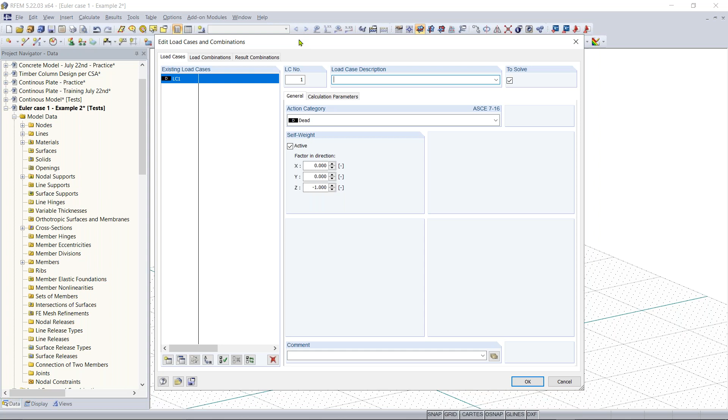And I'm going to apply the load to this column. So first, before we apply the load, instead of having to go create a new load case and combination, we can go up here to new and nodal load, which is the load we're going to apply to the node. Nodal loads are point loads. So I'm going to click new nodal load, and that's going to bring up the edit load case and combination, because the program recognized that we don't have any load cases yet, and loads have to be assigned to a load case. This load case I'm just going to name test, and it's going to be in the action category dead. Again, I'm just going to turn off the self weight, so I'm putting in this name here and self weight off, just so we know. Once that's done, I'm going to hit OK.

And now we can apply our loads. The program is smart enough to know that now we want to apply our load. For this nodal load, I'm going to apply a -5 kip load axially, and then a 2 kip load laterally, in the X direction, and the axial one will be applied in the Z axis. You can see that in our diagram down here, that will give you an idea of what the loads are going to look like. I'm going to click OK. Now you can see my cursor has an arrow next to it. I can select this nodal load, right click, and rotate the structure, and you can see those loads have been applied to the top of the column.

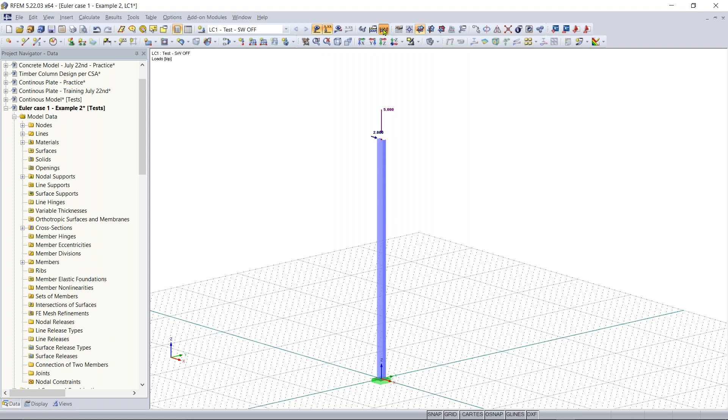So now I want to show you something important, and this is very important to know when working with our software: if you go up here and run our calculation, the internal forces and deformations will be calculated. If I look at the side view, I can see my global deformation is at 3.78 inches, and that's in the X direction. We can also go over here and view our internal forces of this column or member, and get a look at our moments and shear again. Now I want to show you how this linear or first order calculation differs from a second order calculation.

So we'll go back to looking at our global deformations. Now I'm going to open up the load cases and load combinations window again. I can do that by going up here to this button, going to the drop down, and selecting load cases and combinations.

So generally under this load cases tab, load cases are calculated based on a first order analysis, and load combinations are calculated based on a second order analysis. That's just by default, and those can be changed.

So under load cases, for example, I can go to calculation parameters, and you can see that the load cases for the method of analysis are set to a linear analysis. You can change this to a second order analysis. Maybe you recognize second order analysis from the phrases little p-delta and big P-delta.

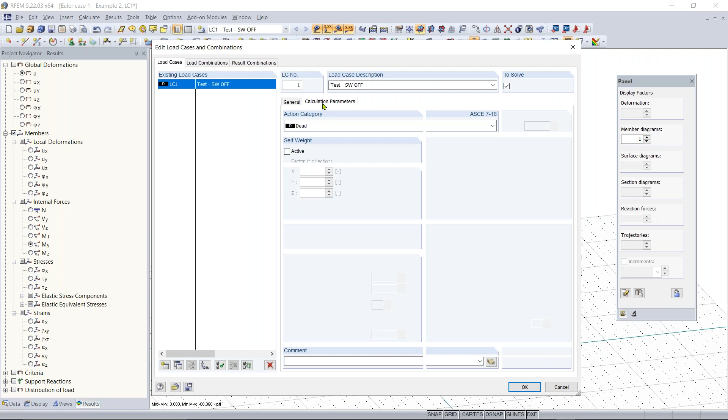If we switch our calculation method or method of analysis back to a second order analysis, we can do that again by going under calculation parameters. We'll set it to a second order analysis, and hit OK. You should see, if we run our results again, that our max moment has increased by 1 kip foot.

So keep this in mind, that you will get different results based on different analyses, and the load cases are set to a first order analysis by default, and the load combinations are set to a second order by default. This is because our deformation is larger with the second order analysis, and that is why our moment has increased, because that deformation has increased. That will give us a larger moment arm, you could say.

Another note I'd like to make is that members in RFEM are determined to be a beam or column solely based on the loads and how they are applied to the member. In this case, we have a column because our loads are applied axially to our member. If we had a lateral load placed at the middle, RFEM would assume this is a beam.

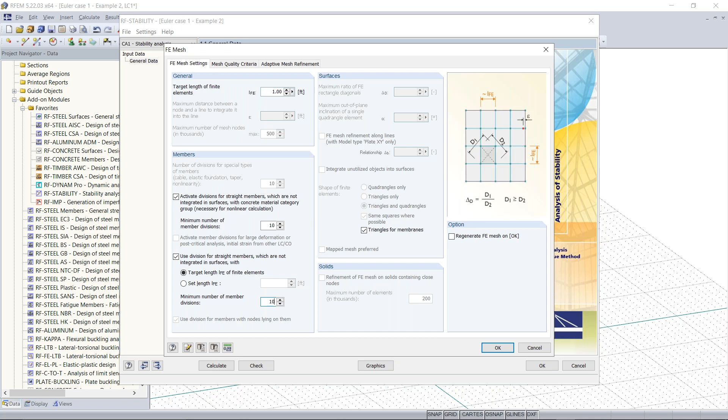For more accurate division of my member, I'm going to go down here to minimum number of member divisions and change this from 2 to 10, and hit OK. All these other options are default, and I'm going to leave everything as default and hit calculate. I'd also like to mention that the load case is set to load case 1.

Once that calculates, it takes all of the information from RFEM, all the internal forces and deformations, and brings it into the add-on module. Now we get a critical load factor and a magnification factor. The critical load factor is the amount you would have to multiply the loads by in order to get an unstable system. If I wanted to make the system unstable, I would have to multiply the 100 pounds applied to the column by 135 times.

Now we do also have P-delta, or second order analysis, activated, so it's not completely linear in that way. This critical load factor can also be looked at as the total percent of loads your structure can take. Within this module we also have our effective lengths and our effective length factors.

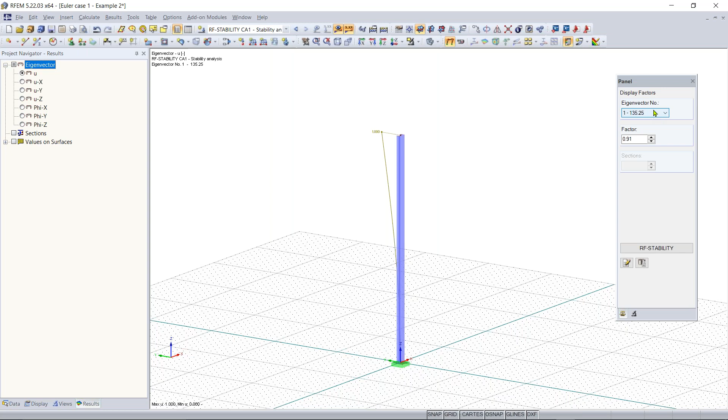We can also look at these results graphically and look at the eigenvectors. If I go down here to my graphics button, I get a new tab in my panel for eigenvector numbers. To get a better view, we can turn on colored cross sections by going to display, then under deformation, turning on cross sections colored.

So we can get a better idea of how that eigenvector, or eigenform, looks. We can look at the first buckling form, the second, third and fourth. For this first one, it's clear that the column will first be unstable in the weak axis direction, perpendicular to the flange. This makes sense because this is the lowest moment of inertia direction.

We can look at our moment of inertia again and see that the moment of inertia about this z-axis is the lowest. So we can close this, and now jump back to RF-STABILITY and look at the effective length factors again. I have to recalculate real quick; this should only take a few seconds. And it's back up, so again we have our effective lengths and effective length factors.

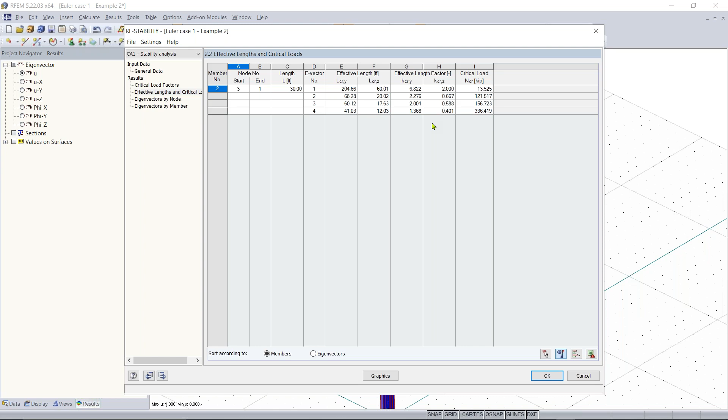Now I would like to show you what it looks like when the structure is unstable because the load is too high. I'm going to click OK, and up here in the drop-down window go back to load case 1. I'm going to increase this load until the structure is unstable. I did this in preparation and found that it was unstable at -14 kips applied.

Now, once this loads, you'll see if I run my results with P-delta or second order analysis activated, I get a calculation error message telling me my model is unstable, and I should look at the critical load factors and buckling in the stability add-on module. I'm going to close this.

Since I get that unstable error, I'm going to turn off the second order analysis and make this a linear analysis. I go back to my calculation parameters, turn this to a linear analysis, click OK, and then run my structure in RF-STABILITY by clicking calculate. It takes the internal forces, material, cross-sections, members and everything from RFEM.

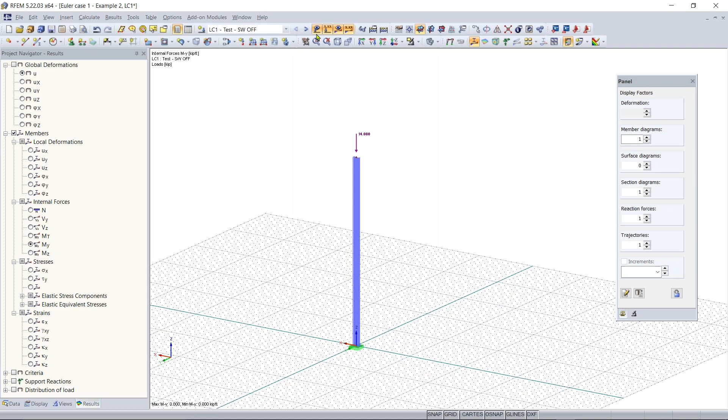So we'll move on to the moment frame. So I'm going to go back to my load case 1, and I'm going to turn my results off, and I'm going to change my load by double clicking on it. I'm just going to decrease it to 5 kips. And I'm going to have only the axial load, no lateral loads. I'm going to hit OK.

And I'm going to change the height of this column by highlighting my node and making sure only one node is highlighted this time. I'm going to double click on it. And I'm going to change this height from 30 feet to 10 feet. I'll hit OK. And I want to create this moment frame, and the easiest way to do that is to simply highlight my whole entire column here, and then I can simply hold Control, drag, and make a copy of this frame. And then I can create a beam.

So I'm going to go up here to New Single Member, and then I'm going to go to Import from Cross-Section Library. And I'm going to go to I sections. And then everything's set, so I just want to go to sections 8 by 15. So the beam at the top of this moment frame is going to be an 8 by 15. My material set is still A992. I'll click OK. I'll click OK again.

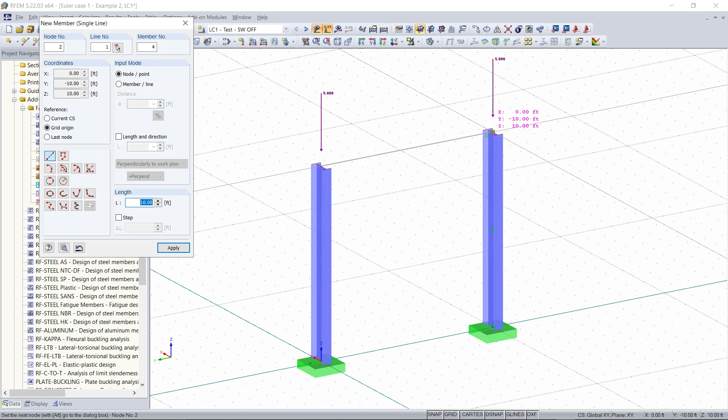And now I can draw my beam. Whoops. Let me just get a better view of this. I can draw my beam by selecting and left clicking on the top node here. And I can draw it across, and I can select the node on the top of my second column. And now we have our moment frame here. So now I can run a calculation on this moment frame as well. And that should only take a split second.

And now I can take a look at my global deformations. I can see them only in the Z direction if I'd like the Z component, or I can just have the result component. And then I can also take a look at my internal forces. So I can take a look at my moments, and right now my moment diagrams aren't being shown. So let me just turn this on.

Make sure they're on 2 colored. I'm under deformations. Collapse this tree, members with diagram. And now we should get, oh, we just don't have, okay. We have no moment here. So let's say we add in that lateral force. Add 1 kip here, click OK. Add to this one too. And then we can run our results.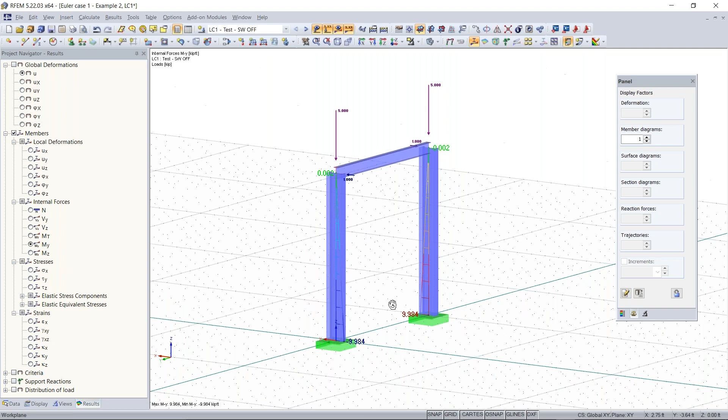So now we have our moment diagrams here shown with our results. We also had our global deformations here as well. I can show those color cross sections again. And then let's say we only wanted to keep this moment frame in the ZY plane. We can select our nodes here. Rotate this, select our nodes. I can double click on both of these nodes that are selected, 1 and 2.

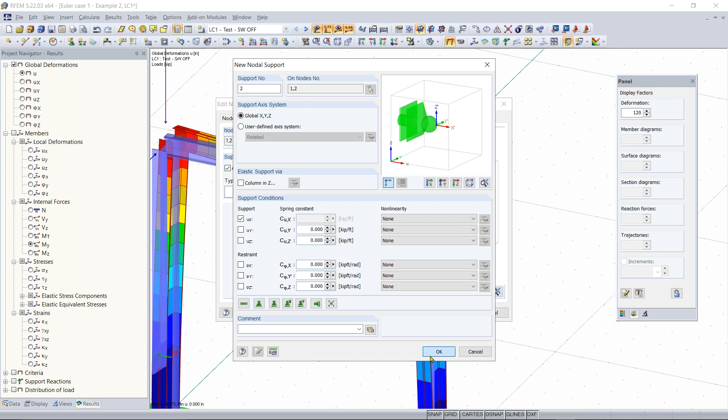And then we can add these 2 nodes here, and we can keep the deformations in plane. So translation, I don't want them to move in the X, but I do want them to move in the Y and Z. So I can turn that on and keep rotation all unlocked. Click OK. And then I can run my results again.

And then we can also take a look at our stability and make sure that our moment frame is stable. So there you go. Our deformations are in plane. And I can go back to our stability, run a quick calculation. And our stability will give me the critical load factor. So it's well above 1. It's at 81. So we are completely safe with these loads applied. So now we can also, again, look at the different eigenvalues and eigenvectors and cycle through those as well.

So are there any questions so far from anybody? I see there's another question. So is there a rule that if the factor is less than 10, a nonlinear analysis is required?

So I can answer that. Okay. I think that there are some conditions within the Eurocode, for example, that if the critical load factor is less than 10, a second order analysis should be run. And then if the factor is less than, I want to say 2 or something, then the structure needs to be redesigned. But this is all code specific. And here within the AISC, we do not have requirements that I'm aware of. So it all just depends on which code you're designing to.

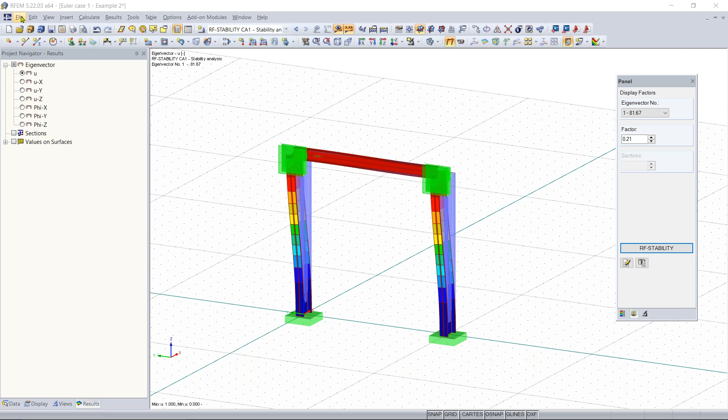So I'll open up a new model. And I'll just name this one concrete model 2. And with the concrete model, it'll be a 3D model, and it'll be according to the ASCE 7-16. And with this model, we can create our load combinations automatically, and everything else we can keep the same by default.

So now we have our blank work window, and I'm going to start by making sure the grid points are spaced out dynamically according to the size of the model. My grid spacing for each grid point is 1 foot, so I'll click OK. And then, oops, sorry about that. Turn that back on. There you go, so you should see RFEM again.

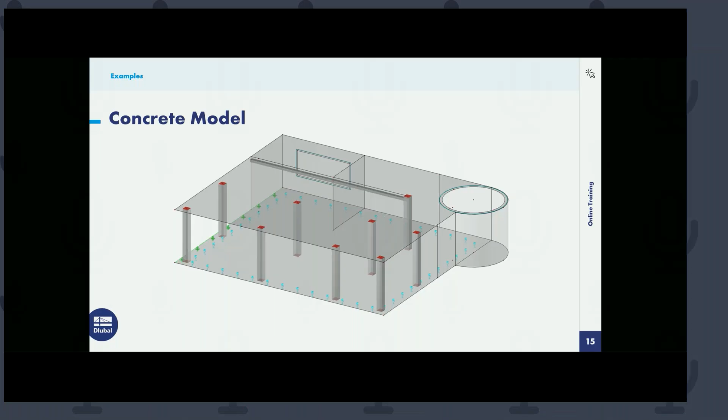So this is what the model looks like. It's basically a large floor slab and a large ceiling slab with a hole cut out for a spiral staircase. And again, this is the floor slab. We have a support over here because it is connected to an adjacent building. And then we have our concrete columns, along with a window back here for an opening and a rib member acting as a downstand beam. So I'll start off by creating the rectangular surface. So let me go back to RFEM.

So I'll go up here to my rectangular surface, and then I'm going to select a material. So right now it's set to A992, and I'm going to set it to concrete 4000 PSI. After using these materials so often, they're just set in here by default. And then the thickness of this floor slab is going to be 8 inches. So I'm going to keep that as default, and then I'm going to click OK.

Now the beginning of this floor slab is going to be connected at the origin, and the whole thing is going to be 46 by 40 feet. So we're going to go up here to 46, and in the Y, 40. Click there. Let me check the, okay.

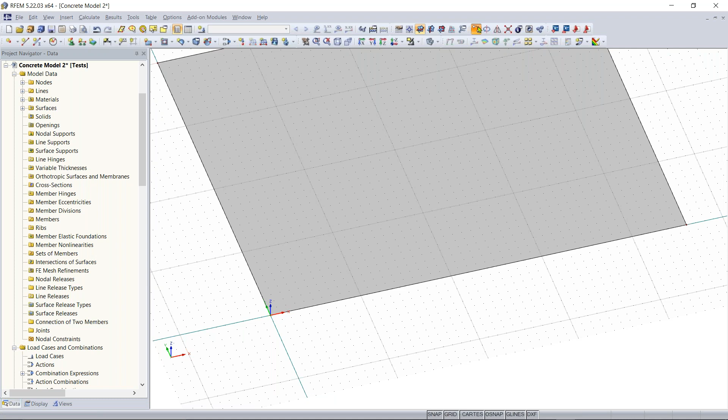Yeah, okay. So now I'm going to move on and create the nodes that are going to act as the bottom of our columns here. There's multiple ways you can model in RFEM. I'm going to show you that you can take this node from the origin and just make a copy of it. I can move this node using the move and copy tool. I'm going to make 1 copy of the node, and it's going to be moved 2 feet in the X direction and 2 feet in the Y. I can hit enter, and that node is created.

Now we can use that node as a basis for laying out the rest of our columns onto this concrete slab. I'm going to select that node again and make 2 more copies of it, with the displacement vector at 16 feet in the X direction. So I'll click OK. Now you can see these 2 more nodes in the X direction, 16 feet apart, have been created. And since we're going to have 4 columns in this row, I'm going to hold Control and copy this node, symmetric to the left-hand side node.

And then I'm going to copy this whole entire row of nodes. Just like in Windows, you can hold Shift or Control down to select multiple things. I must have moved this 3rd node here. I'm going to Control Z to undo. There we go. I didn't copy it, so make sure Control's held down, copy that node. There we go. So now I can select all 4 of these nodes. Oops. And then I can just right-click on a node and hit Move and Copy. I'm going to make 2 copies of this row, moved 13 feet in the Y direction.

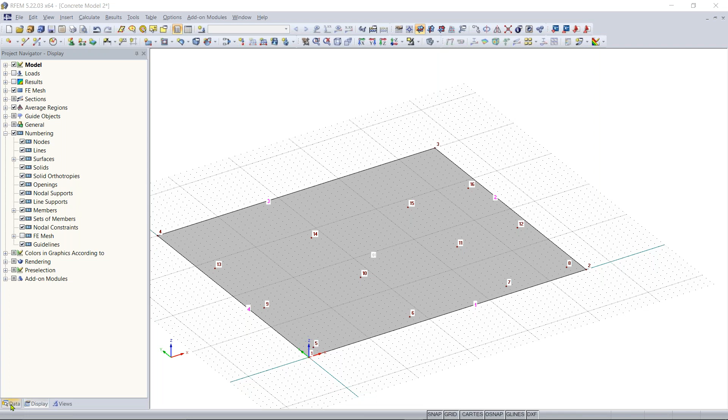So now I want to create the walls for my perimeter here. To segment these lines, I'm going to divide them to give me the length of my wall. I can do that by going to divide line, graphically, and I want my wall to come out from this corner right at this node here. So that's going to be at 12. And I also want the wall to come out from this node right here to line up with this axis here.

So I basically just divided this line here because this is where the wall is going to connect. That's one way to divide lines. I just did it graphically. You can also do it with the other 2 options under the divide line tool. And now I would like to create my semicircle surface over here that's going to be the basis of my spiral staircase.

So I'm going to go up here, and under the rectangular surface tool here, there's a little arrow that you can click, and you can see that we have a multitude of tools here where you can create almost virtually any shape surface you'd like. I'm going to use the semicircle tool. My semicircle is going to have the same material properties and thickness as my surface here.

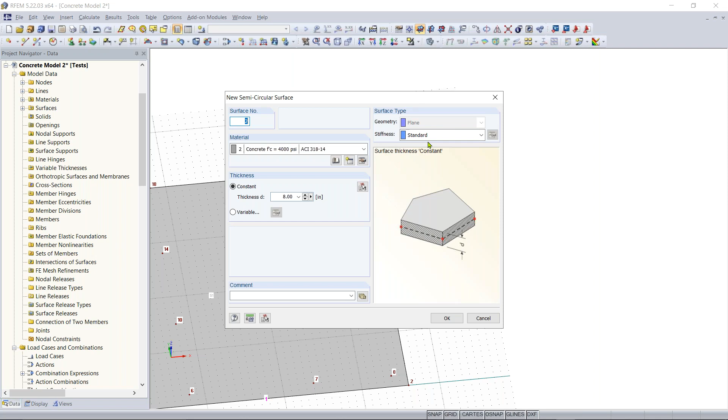Another thing to mention is there's multiple surface types and member types that you can choose from. For surface types, the stiffness you can change to maybe an orthotropic stiffness where you can customize the stiffness. Maybe you just want to make a null surface that does not supply any stiffness or rigidity to your surface. You just want it for a reference. You can also use completely rigid stiffnesses to maybe distribute a load onto something like that. So for this, we're just going to keep this standard. I'm going to click OK.

And the radius of this semicircle is 7 feet. So I'm going to draw the origin or the center of it 7 feet away from this top node here. So that's going to be at 4640, or no, it starts at 4640 and it goes down to 4033. Now I can draw the semicircle, click again, and then right click to exit out of the tool. So now I have my semicircle here.

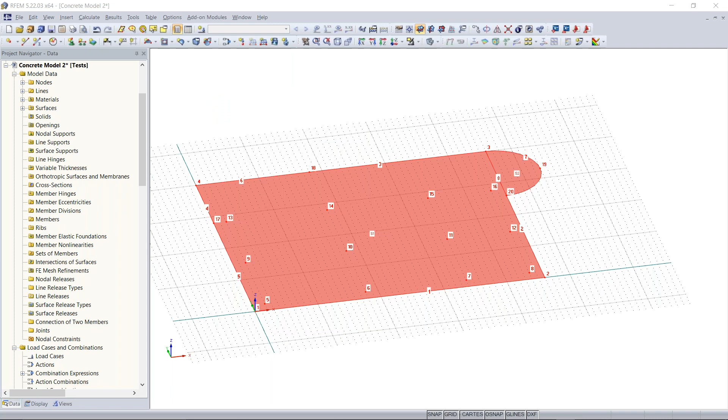And so now that our bottom slab is created, we can move on with creating our ceiling slab. So an easy way to do this, since our ceiling slab is basically the same shape as our floor slab, again, we can use our best friend move and copy. So I'll select the whole entire slab, hit move and copy. I just want to make one copy, and I just want it to be displaced 11.83 feet vertically in the Z direction. So I'll hit OK. And now we have both of our slabs here.

I can look at this in isometric view to get a good look at that. And now I want to look at the top-down view, or the reverse Z direction. So I'm looking at this from the top. I can also get a perspective view. So maybe I want to be able to see both my ceiling and floor slab.

So there's a question. Can the copy function also include copy load? Assume the loads are already pre-assigned to the model. Yeah, so if I had a load or a point load, I'm just going to apply a point load real quick. So if I apply a point load, as my computer catches up, I can do that. I'll just make it, I don't know, -1 kips. Click OK. Put a point load there, and then take this out of its perspective view.

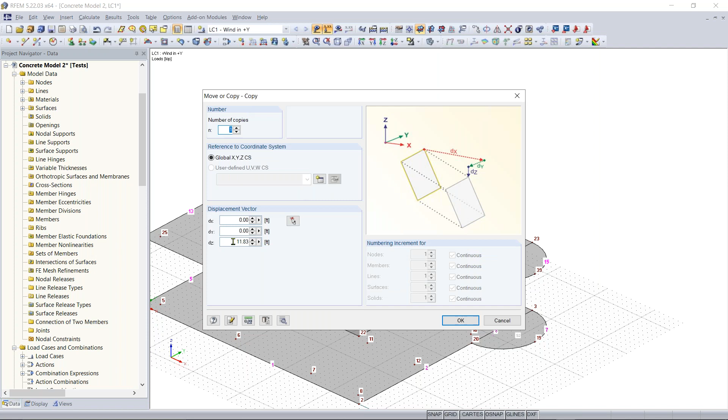I can copy that load and select it, and I can either hold Control down and drag this load and just place it wherever I want. And you can also use the move and copy tool to make a copy of the load and move it wherever you want. Actually, this one, let's say I just want to move it. Yeah, so actually, I might be wrong about the copy and move tool. Do you know about that, Amy? Yeah, you should be able to use the move copy tool for loads as well. Okay.

So if I maybe just use this, oops. Maybe if I want to move it this way. You need to select 2 points. Okay, yeah, you're right. So create that displacement vector. If I make one copy. Yeah, so maybe the move copy tool doesn't work with loads. I thought that it should. Something we'll have to look into. But yeah, the drag and drop works fine for copying loads as well.

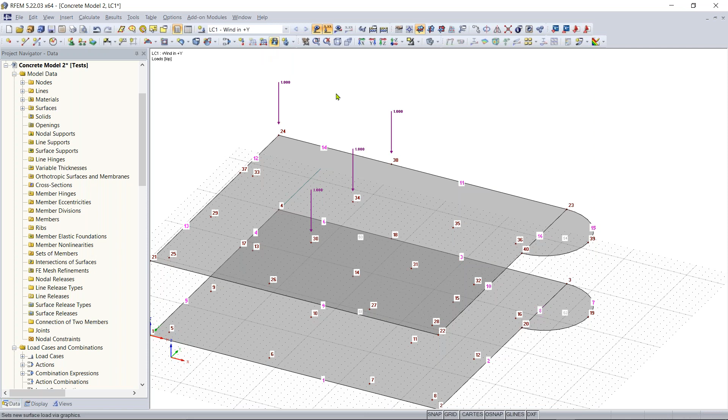Yeah, I think with the move and copy tool, the problem might be it's a nodal load. So if you're going to copy it, you need to copy it onto another node. You can't just copy it onto an arbitrary location. Yeah, so I would just use the hold Control and then copy. You can also do that for surface loads, and you can do that for uniform or for linear loads as well. So yeah, you can just use the Control and copy.

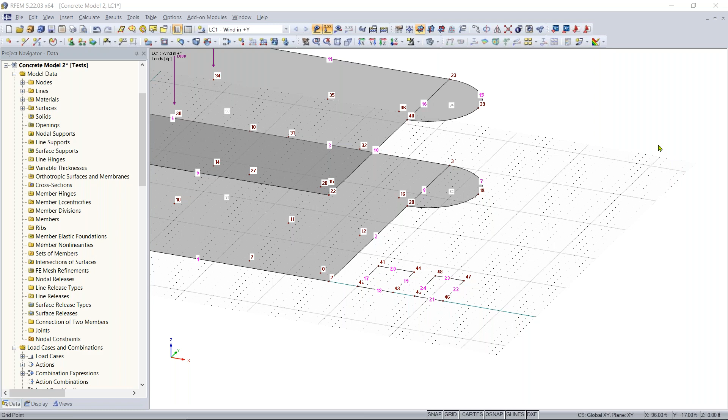This was also what Amy was talking about earlier with deleting these surfaces. They just leave the boundary lines, and then you can connect them and recreate the surface like that and merge them.

We have one more comment essentially: seems like if I need something, it should be in the project navigator. Yeah, for the most part, the project navigator really has most of the elements that you need. I think the project navigator is the most intuitively laid out. You can also find a lot of things in the insert menu, such as the model data. If you're looking for those nodal constraints, they were also in here, you can find them. Loads, things like that, lots of options up here, lots of different ways you can go through with your model.